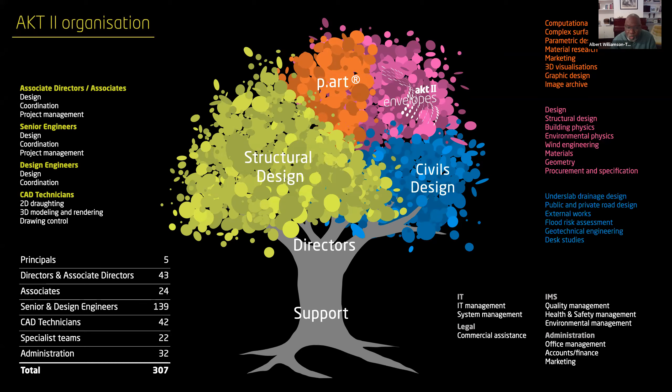London is our doorstep. This gives an idea of some of the areas and some of the projects we've done around the inner London area over the years. Just to highlight some well-known projects, we're doing some of the tallest residential at One Nine Elms, over 200 meters tall, two towers.

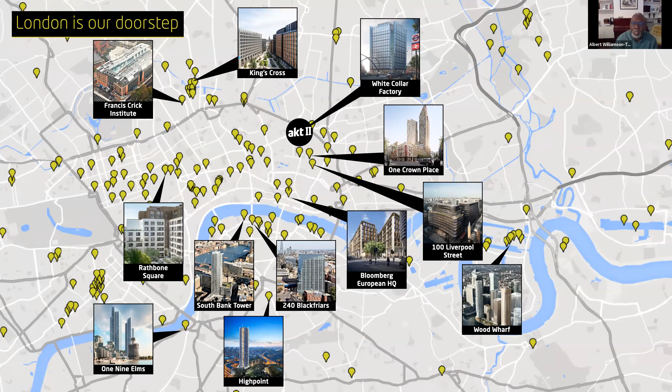But because we're a very design-led organization, academia is very important, so we have academic involvement literally all over the world. We do a lot of workshops and seminars and try, as Dr. Popola was talking about, to learn from other people and exchange ideas.

The way we've set everything up was to basically not try and get ourselves pigeonholed as being called either a transportation engineer or a bridge engineer or offices. We have a situation in the office where we all sit in open plan offices in the white collar factory, which is one of our buildings.

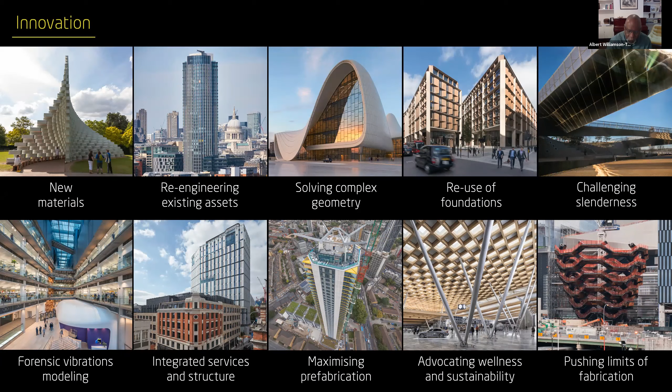And then we're also involved in all the leading organizations, and one of my guys is a professor at UCL. So we make sure we're involved in the right organizations, not just in the UK, but internationally.

Engineering design is not about engineering. The numbers side of what we do is a given. If you're an engineer at the table asked to solve a problem, the numbers and mathematics are a given. The issue is to create a situation where you have empathy with the whole reason the project is being done.

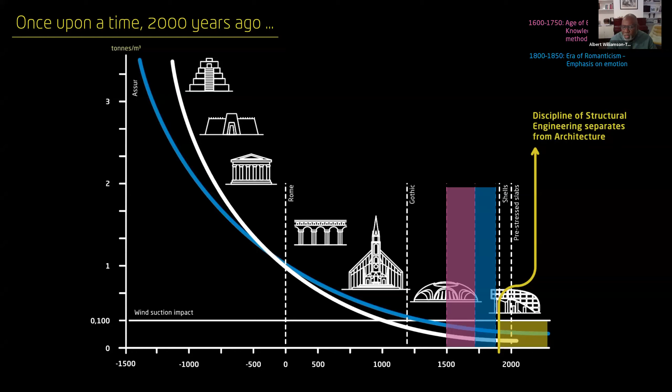What we found at AKT, and for me personally in my career, was to go for the most difficult projects in the office. The more difficult it is, the more challenging, and the more parameters it creates. With those parameters, you can do something different and interesting. So parameters should not be seen as a reason not to do good design—they should be a reason to explore the sides of our industry.

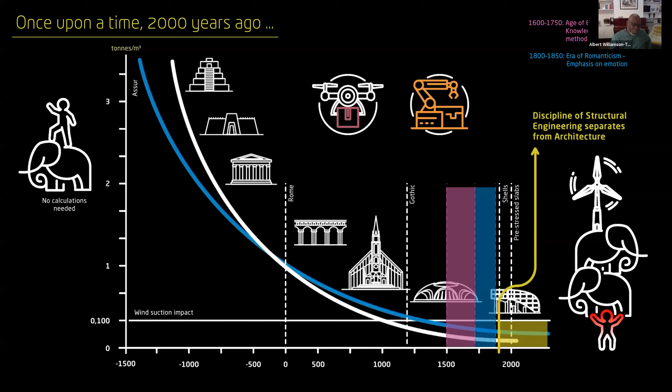It's clear that as time goes on, we don't stand on the shoulders of elephants anymore—we have to carry the elephants, or two of them, in terms of how we make buildings and structures work. We also have to deal with climate change, which has to be embedded in our thought process: low energy, low carbon, and also modern methods of infrastructure, transportation, and fabrication. Those are some of the important impacts.

Innovation is the key to what we do. There was a whole conversation in the late 1990s, 2000s, that innovation is just 'stuff.' I don't believe that. Innovation went through a process where it had to change from the practicality of innovation to the research of innovation, because as soon as the microchip was invented, a whole new raft of engineers came into being, and those engineers had to go through the process of understanding the capacity of what they could do with this new tool.

I remember when I was at university, my undergraduate project was one of the first—only postgraduates were normally allowed to use the computers. I think there were three universities, Imperial, Manchester, and Bradford, because Bradford was an Institute of Technology before it became a university and did nuclear physics, so it had the cyber computers. Myself and two other guys were the first undergraduates allowed to use computers at the time.

The computers we were allowed to use were the old cyber computers, and you could only do two runs a day. That meant you had to get to the computer center before 8 o'clock in the morning, put in your punch cards, go back at lunchtime, look at all the errors, and correct them within an hour. The next batch had to go in by 1 o'clock, and if you were lucky, you'd get results at 6 o'clock. Only postgraduates were allowed to use desktop computers.

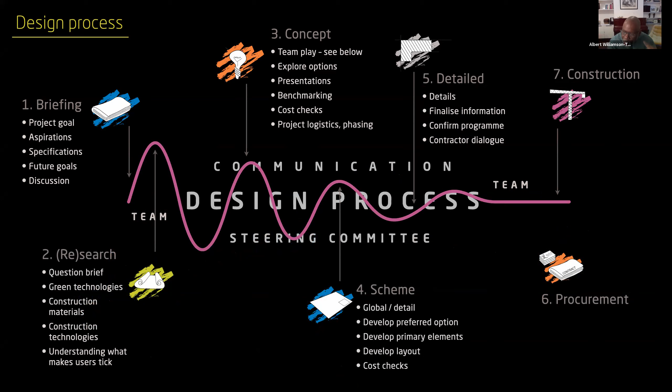So that chaotic nature of design should not be seen as negative. It's a way of our own computer in our own head and the way we process design. In our office - this is the wall at the back of my desk - it's all about sketching ideas. Nothing in the whole process of design is idiotic. None of it is wrong. It's just a different way of thinking.

And by enhancing those ways of thinking, those ideas, you're then able to progress. You may go forward 10 paces and have to go back 8 and start all over again from position 2. That is what design is about, and in my view, something that should be celebrated.

Pushing the boundaries - I'm going to use this area to go through about 10 projects. In my career so far, I think I've done over 130 build projects, more than that, I couldn't say from memory. I'm just going to go through very quickly some of those issues.

My first job was back in 1984, 2nd of January, with Gregory and Associates in Bedford. Then I moved to Price & Myers, and the first project of note was 353 Plaza on Lots Road, King's Road junction. It's one of the first planar glazing glass roofs, a tension roof and a glass wall, done with Pilkingtons back then.

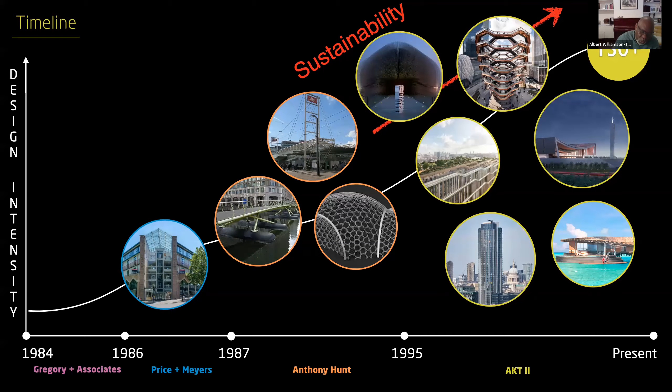So over the years that design intensity has gone on, and as AKT we encourage it to develop with other people. These are some of the early projects - 353 Lots Road, the floating bridge. You can see the small section where it opens, done by a counterweight, so we've only got a tiny little motor which slots into the central spine of the bridge.

The bridge was fabricated by Littlehampton Welding. Bill Totten, who just passed away recently, and we floated it up the Thames from Littlehampton, and then it was literally connected into place.

One of my other early projects, before AKT started, which I was very proud of, was the Sackler Gallery at the Royal Academy of Arts in Piccadilly - one of the first glass installations in a public space. Back then you didn't have laminated glass or toughened glass, it was actually just float glass. But by taking float glass and encapsulating it tight in a stainless steel ring enclosure and going through a testing process, we got it approved - not by any codification process, but by actually a testing process.

So we tested it to destruction, and it stayed in place, and it met all the loads and everything, and it was then built. And the one I'm very proud of, the building, the Royal Academy is a Grade 1 listed building, and we were still able to do some work on it.

And we created these portal frames for the gap on the 3rd floor. By creating the portal frame, the architect, Norman Foster, was very clear. He wanted the glass on the roof to actually run down without any steel members and put a very simple pin. We were able to do that and still provide horizontal restraint to the structure, but doing it in a very different way.

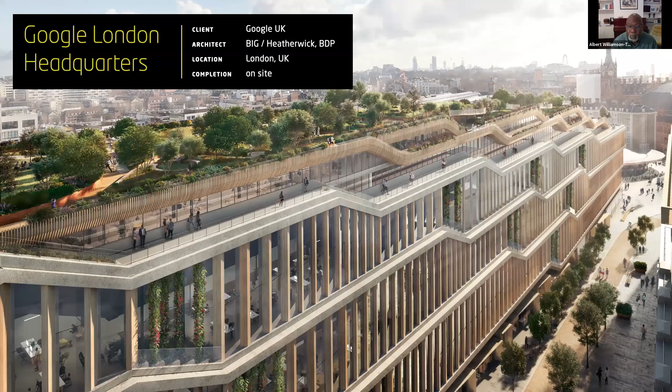Now, I've got roughly about 10 projects which I've put on. I'm going to run through them very quickly and use them as a way of explaining some of the challenges and some of the stuff we've had to deal with. I've got a fantastic team I work with, and design is teamwork. So I may lead the projects, but having young people and people with ideas around you is the way to go, and that's the way we've approached this.

The first one is the Google headquarters in London, which is at King's Cross. The architects are Thomas Heatherwick and Bjarke Ingels, BIG, and with BDP, the executive architects. This building is 300 meters long, so it's actually the same size as the Shard, but horizontally.

Going back, it's roughly at the far end of the building about 66 meters, and it's about 22 meters at the front. It's about 12, 13 stories on one end and down to 8 stories on the other. The concept is that you've got the boulevard next to the building, to open up the boulevard, and this building, the whole ground floor has got no columns at ground level. There's no external columns to this building.

So the way we've done it is we've got a series of frames at roughly 9 meters with these 2 columns. We then run into the cores, and then with trusses that stagger up from the 8th floor to the 12th floor, and they literally hang the external wall and all the floor structure. Every 3rd or 4th floor is a concrete structure, and in between we've got timber floors.

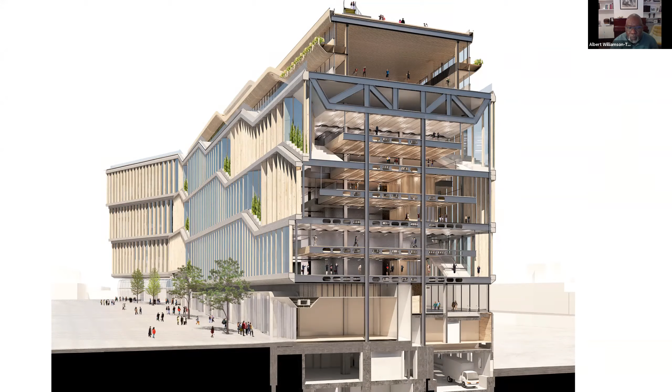So this is an image of the aspiration. You've got these timber floors that are not supported. They're actually hung by the floor above, which is then hung back to the concrete floor, which is then hung by the truss on the roof. So you get these double, triple height spaces on the perimeter of each of the main floors, and then the other floors are staggered in and staggered out.

So these timber mullions are best part of about 12, 14 meters tall. And you've got flats used to hang the building, which are a reflection of King's Cross and its Victorian heritage on steel plate structure. So this gives an idea of the floor plans.

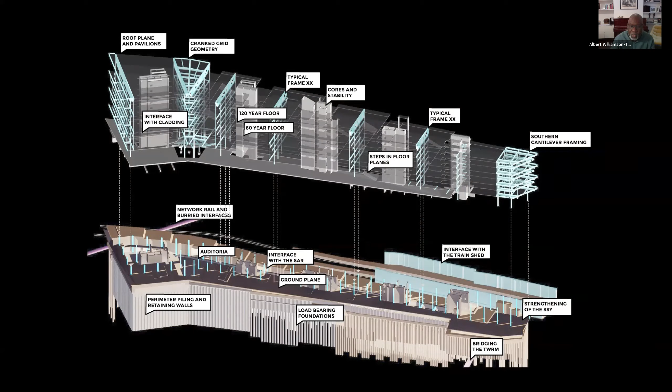These are literally level 3 to level 6, goes right up to level 12. So we've got concrete cores, the best part of 5 concrete cores, and between those cores you've got these trusses with these sections, and then they hang the external wall. So the whole of the ground floor is opened up without any support. This is on site right now, and this gives an idea of the frame.

So we use visualization. All of these images, none of them are the architect's image, they're all ours. We do our own visualization using 3D modeling. We work with Rhino, 3D modeling, any of the modeling packages we will work with. We always tell the architect, just give us your raw model in any format you work with, and we will do the conversion internally.

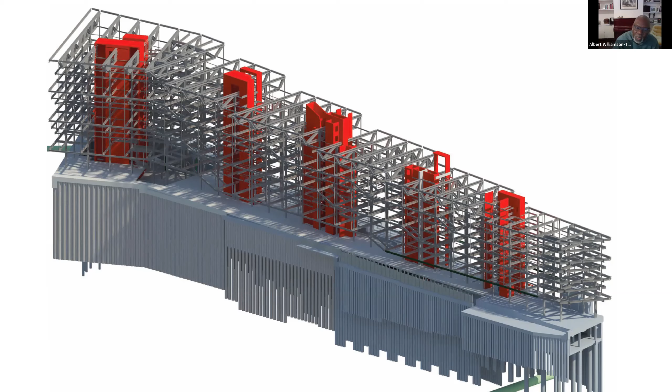And we use them to try and understand some of the overall concept. You've got to work back from a micro to a macro level in terms of how the whole structure is going. So this gives an idea of what we're doing.

The most challenging thing with this project was the fact that we're creating the largest amount of commercial CLT timber floors probably in the UK. And every CLT floor, from a sustainability point of view, they have to add a minimum of 75 of screed or concrete on top of it to deal with the damping.

We are not doing that, so we are going against the norm. We've had to bring Exeter University in. We've done a lot of research in terms of movement to get the response factors, to bring 95% of the floor with response factors below 8, which we've been able to manage. That's done by research and actually doing a lot of testing on site. This was the biggest challenge we had, and we've managed to do it.

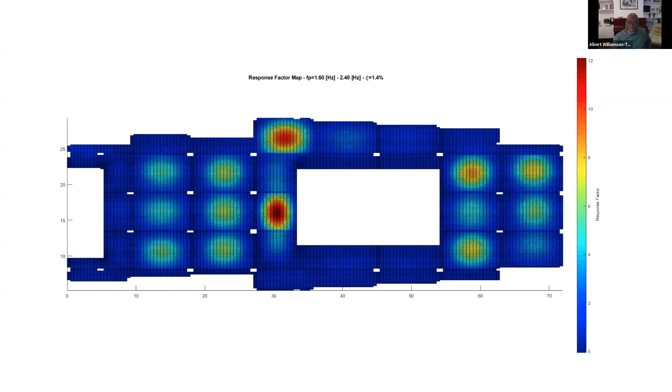The next building I was going to talk about is the Google headquarters in San Francisco, and we were called in. Google had been working with some of our usual competitors for about 7 years, trying to create a series of master plans. This was being headed up directly by Larry Page himself, Mr. Google.

They wanted to create a headquarters in light of what Apple was doing with the ring. So they held an international competition, where they asked a number of architects and designers to come and give them their ideas. Thomas Heatherwick and Bjarke won the project, and we were called in to try and bust some of the myths of engineering.

The client was very much inspired by Buckminster Fuller. The whole idea of the master plan was to create something like 5 to 6 million square foot of spaces. So the first bit was to do a master plan and go into outline planning.

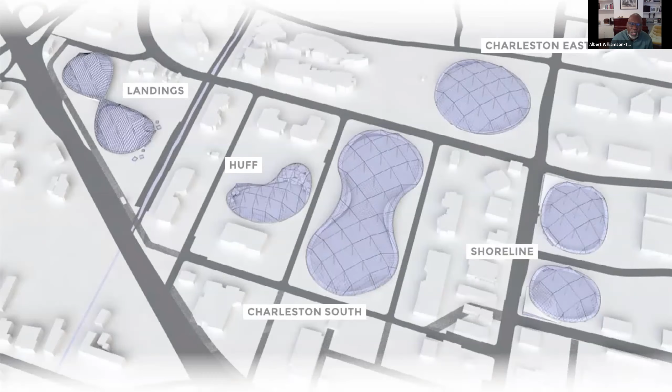He was really inspired by Buckminster Fuller in the 1950s, in terms of how you can create a lightweight dome and beautiful enclosures with walkable spaces internally. His inspiration was that all the offices of Google in San Francisco have got the best part of hospital quality air, which is what he wants his staff to engage with.

So what that meant was he was very keen to create a series of these domes. These are some of the images that went in for planning. We went through that process, which was very complex.

By having the best part of 130-meter domes, the whole principle was to go from creating a dome with a human scale internal, mingling on a park area, like a kit of parts, and then the analysis, the digital and analog approach to make that happen.

Then we come to the materiality and the fabrication. By actually creating this canopy, you're then building inside the canopy. The way Google works is that if they've got a team, they can change it very quickly from about 10 or 20 people to 50 over a weekend when a new idea comes through.

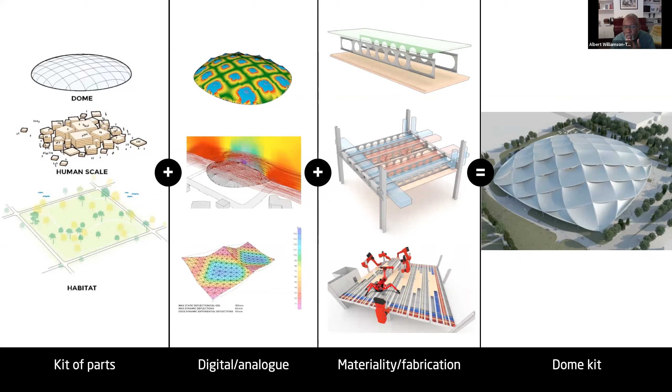They wanted to develop an idea or shrink them, changing the layouts of the floors either over a weekend or a week. So we talked about robotics, using spider cranes, and creating the dome kit. These are some of the processes, and I hope you can see some of the animation.

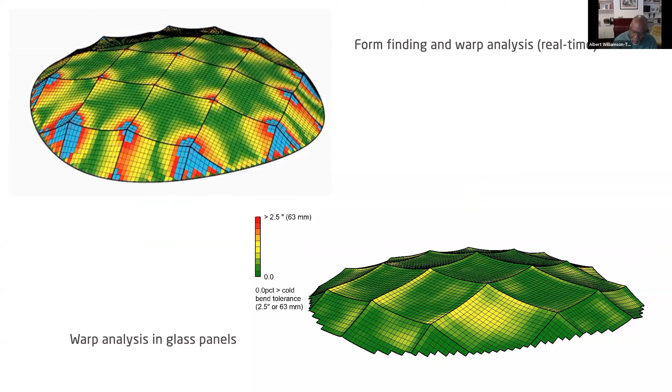These are some of the processes we had to go through: form finding, warp analysis in terms of creating — we started with a cable system using a glass enclosure for the enclosures. Then we developed that further with wind analysis. Remember, we're in San Francisco, one of the highest seismic areas as well.

Some of the analysis we had to simulate was also to make sure there's no ponding. By creating this visual approach, it allows the client to understand some of the thought process of the design team, and gives an idea of the views or vision they had for some of those internal spaces.

These are some of the issues we developed — if we can end up with robotic cranes that clamp onto the columns, that allows you to then remove panels, move things, and use spider cranes to lift and deal with some of the robotics that can be done internally.

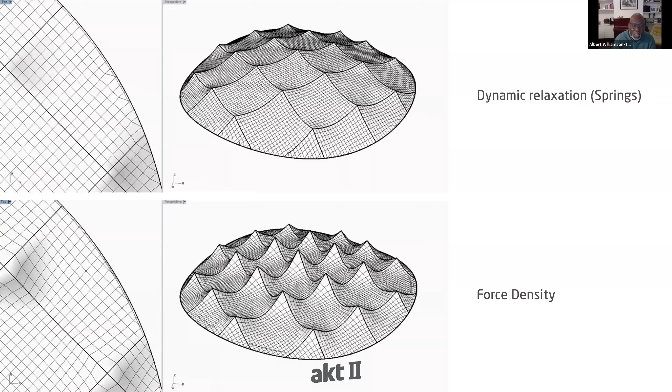Then we had to use dynamic relaxation and force density to look at how this works in real time — the bottom one is a bit slower — to see how we can create this dome by forcing a cable net into place, or allowing it to relax and deal with the deformation. The option we first started with was a cable net option, which you can see here, with a huge ring on the perimeter.

And what that did was force a huge amount of vertical and horizontal forces at the foundation level, which was impossible to deal with in an area that has got one of the worst ground conditions. And in terms of seismic, you end up with a huge amount of liquefaction, and that was very impossible to do. So we had to rethink.

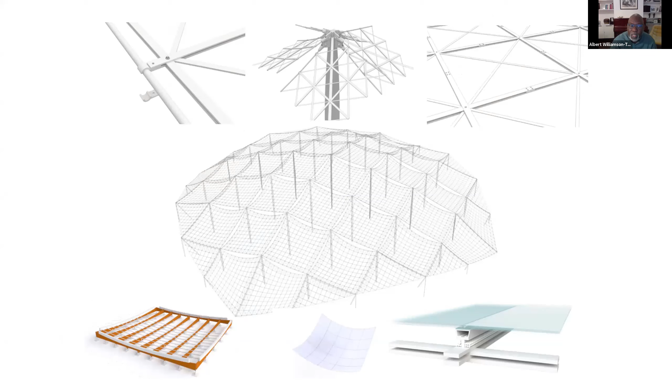So even after we'd done all this, we had to go back again and rethink the whole concept. And what we then came up with, we'll call a grid net, but rather than using cable, using a series of flats, two flats, and you literally cross each other to create this grillage structure, because the flats create their own inherent stiffness, and that stiffness reduces the forces around the perimeter, which in turn reduces the forces that go into the foundation system.

And we then created this dynamic visualization for the client to make him understand what we're talking about. When you're talking about glass panels, on one hand it's a grid net situation, and the other is a cable net.

And the deformation due to seismic effect meant that using glass became a real problem. Every time you have a tremor, you end up with a huge amount of damage to your cladding system. So by doing an exaggerated analysis, using the seismic graphs and coding those and putting them into a real-time matrix, we were able to see the effects and implications of the seismic requirements for California.

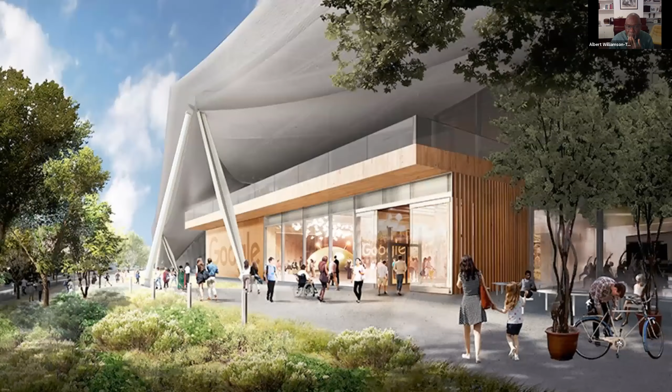So in conclusion, we went through all of this over a period of time. We looked at different options, and we ended up with this solution. And this is it being built. I hope you can see this short video that actually shows it in construction.

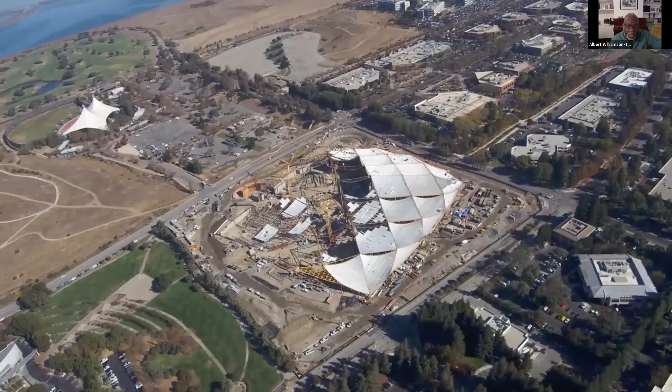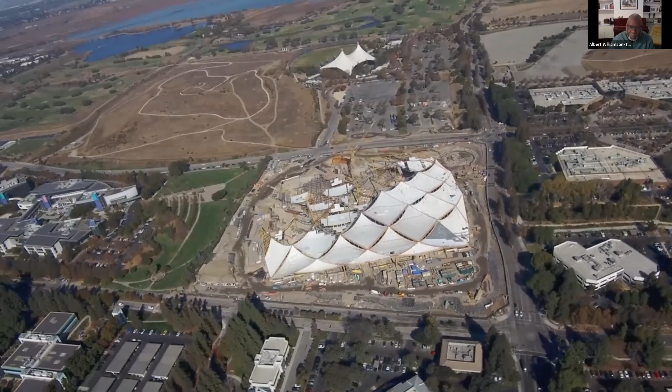Arup are the delivery engineers on this. We did the front end, and they're doing the second part of it. The site, to the south, or to the left coming up, is the main Google campus, one of many, but the main Google campus in Mountain View. So you can see this site, and it's virtually almost completed now.

And then the next project I'm going to talk about is the Heydar Aliyev Center, which we did with Zaha Hadid herself when she was alive, and with Patrik Schumacher. This is in Baku, Azerbaijan. At the time, nobody wanted to go to Azerbaijan, it was a no-go area. And this is the scheme, which is a conference center, a museum.

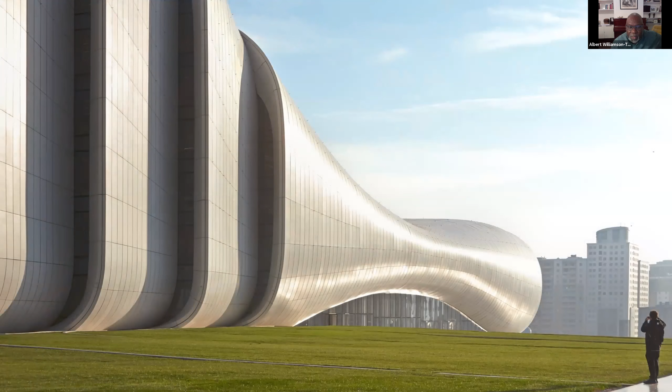The whole idea here was that the ground plane was going to be white concrete that then literally goes into these curvatures. So we were called in and we did a competition with the architect and said, of course we can do it. And this is the real building. How are we going to make this thing work? How are we going to create this?

So you had a theater, you had a museum, you had a conference center, a multi-purpose location for the locals. These are images of the finished product. It's the center.

So our work, the first thing we tried to explain, and also Baku, Azerbaijan is a seismic region. So the first thing we had to do was create a very short report with images, visuals, to explain to the client all the forces that this building is going to be subjected to: wind drag, temperature effect, lateral wind forces, seismic forces, vertical, large movements.

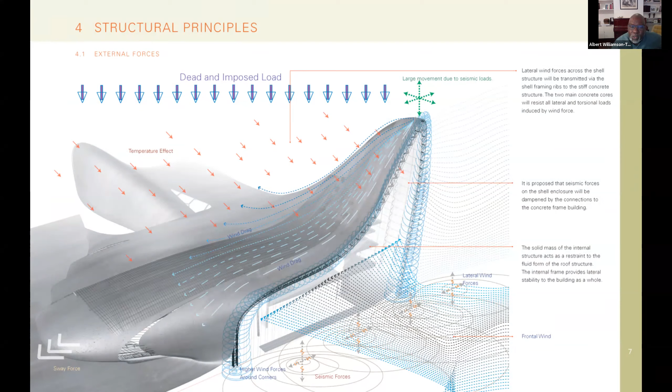We created that, and then we also created a lot of visuals to say, from a conceptual point of view, this is the approach we're going to take, to put a bit of rationality to the form. In doing so, we split it into basically three elements: the vertical core elements, the lift shafts, the main structure; the horizontal element that form the plates, the floors, the levels; and then this shroud, grillage system, this space frame steel structure that encloses the whole lot.

Each one of these is going to be moving in a slightly different way due to seismic effects. So I hope you can see this short movie on the side, which is working in real time from our analysis package.

Our p.art team were able to write from the analysis to the Rhino model. So there's a conversion, and in terms of the movement, we just put a factor in to show movement. This was done in 2009, 2010, to show how the whole structure is going to move, and then in terms of the key areas.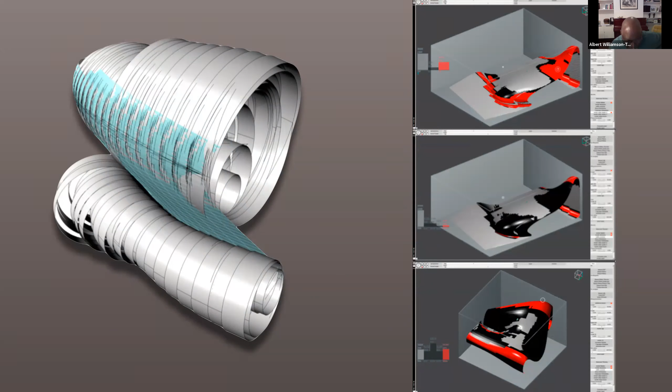The key for us, the most exciting part, was dealing with the cladding system. Our part guys actually wrote this software in-house, and this software was used to pattern the whole of the facade. You can see this short movie, which we did in-house.

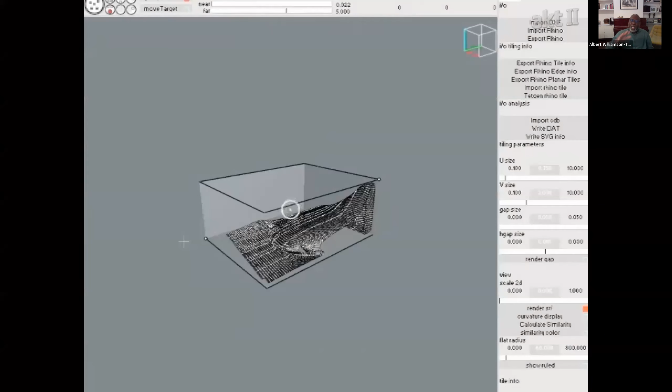We gave this package, the whole thing, to the architect, and allowed him to go through a process of actually determining the size of each panel of the cladding system he wanted. By adjusting the size of the panel and the gaps in between, it then tiled the whole building and color coded it in terms of the ones using flat elements, the ones with specials, which are red, and the ones which are slightly out of tolerance.

So what he ended up doing is giving it to the architect and the whole design team. He then nested the whole lot and drew everything, and we were able to give the data directly to the manufacturer to cut each of the elements. So this was all done in-house.

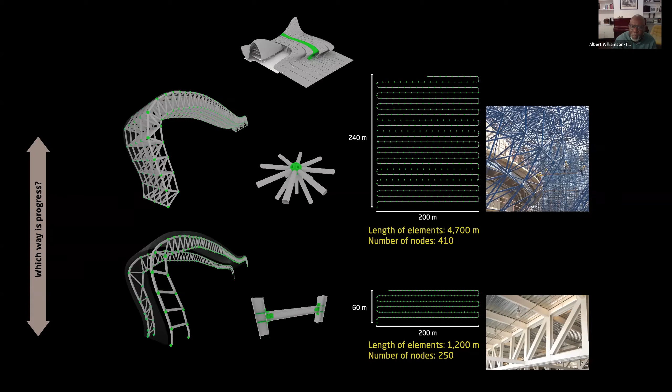But they were the only contractor worldwide who were prepared to go and create the building, so we had to step back again and work with the mirror system to make it happen. This is the building going up, this is the internal - all the curvature had to be determined, and the geometry had to be agreed.

And this is the finished internal layout. This is the concert hall, and this is a performance. And this is the building at night.

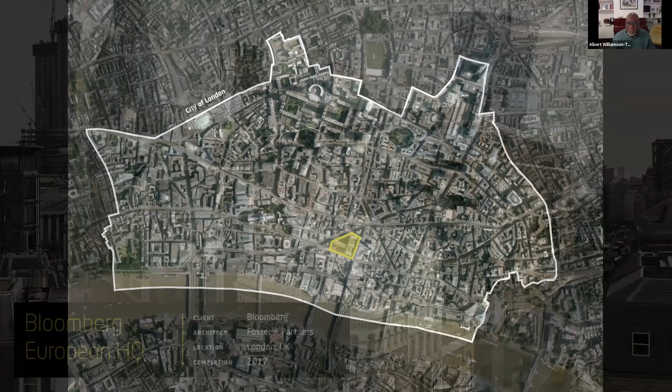I'm going to run through this one very briefly. This is a very important building, a 1 million square foot development done in central London, within the confines of the city of London. This site was one of the last sites which hadn't been developed for a long time in the city of London, and the site was acquired by Bloomberg.

Michael Bloomberg was the mayor of New York at the time, and he said, I've made a lot of my money in the city of London, and I'd like to give something back. Giving something back for him was to try and create the European headquarters for Bloomberg in London. But the challenge was it had to be London-centric, and acceptable to the city of London. It was a very well-established historical site, and there was a whole idea of Bloomberg wanting it to have a fair amount of innovation.

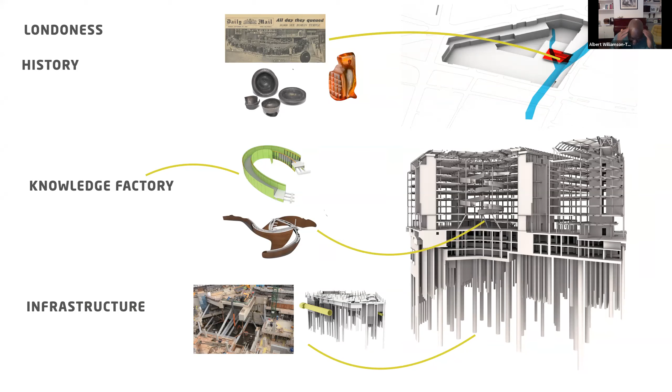Underneath the building, along the side, runs the tube line. And after the King's Cross fire, he said he would actually create a second station as part of our work, so part of our work was also to deal with infrastructure. So let's get a very quick section of the building.

And the grid is trapezoidal, about 13 meters, and we use the thinnest steel structure to make it happen. So people come straight into the center of the building. They use lifts to go to the top, and you also have this ramp stair from the second floor to access all the building.

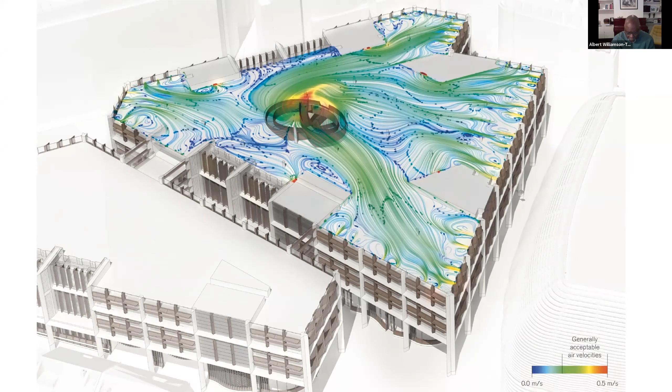So this is the building, 1 million square foot. The challenge was that we wanted it, even as an office building, to be openable windows, and it is one of the largest office buildings in London that hits BREEAM outstanding, the highest level of BREEAM for an office building.

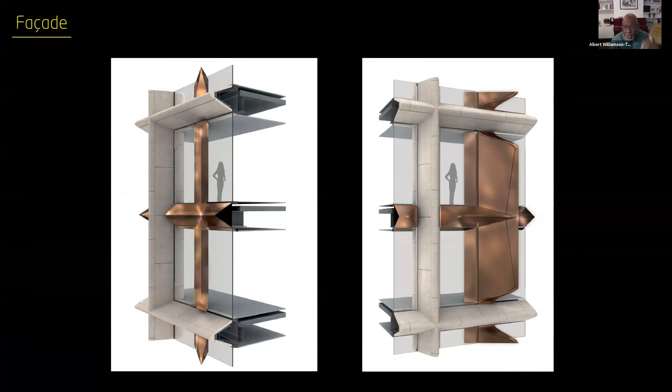And a lot of the work was to make sure it was open and filtered through vents, and keeping the noise away from the building. The facade is bronze, and they had to open an old quarry in Yorkshire just to deal with the amount of stone used to clad the building.

But more interesting was that English Heritage were there. We took out 3,500 tons of soil by hand, and had found the largest artifacts of archaeology on the site, so much so that they actually created a small part of a display unit within the building.

Now, this was a big challenge for us. The site had 3,000 piles on the site, existing piles on the site. And in London, you cannot build a new building onto old foundations because it will not be insured. It will not be warranted.

The CIRIA guide, in terms of how you put a new building on an existing foundation, requires you to actually test a large percentage of those foundations, or you extract the piles from the ground. So we were given this and we said, no, we can't do that. The cost to the client and the time program were just completely unacceptable. So we were in the office having this conversation, and we just took the CIRIA guide, tore it to pieces and put it in the bin, and said, let's think of a different way of solving this.

What we came up with was to actually change the whole scenario of the question. Are pile foundations part of the structure, or are pile foundations part of the ground? In terms of insurance purposes, a pile foundation is part of the structure. So we said, okay, we're going to dissociate the existing piles as part of the structure.

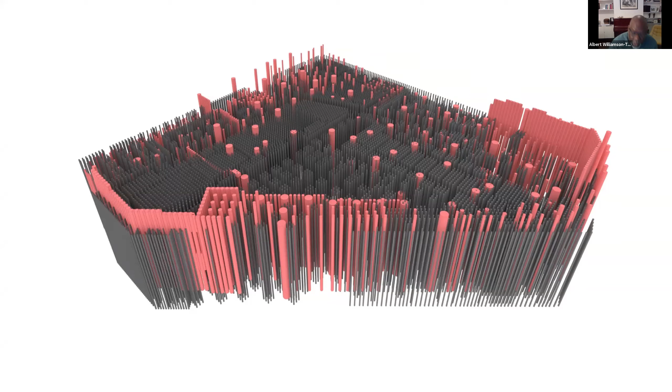So this is the building, and you can literally see some of the tube lines below. So we created a new station. And this is a comparison between the Shard. They're roughly the same area, just about 1 million square foot each, one slightly more than the other. But you can see we're using more steel than they are because of the spans we're doing, and the fact that there's a massive concrete core in the center of the Shard, which we've got less concrete.

The internal ramp, we did this model for the client, and the areas where you see the funny bits, it's only supporting a number of areas, a lot of modeling. These are all our own internal modeling system, and this is it built. And this literally wraps itself, overlapping in a helical version across the whole building, with the views being maintained.

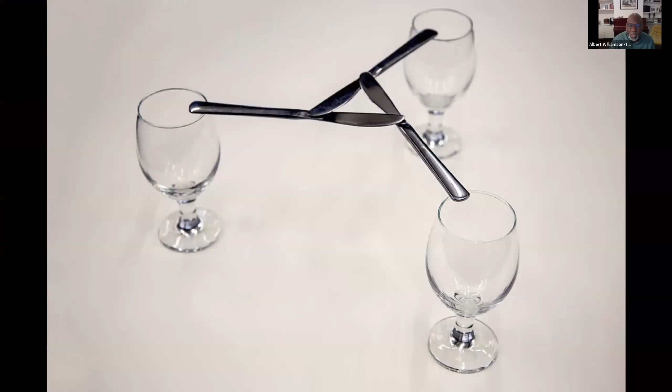And the entrance building was done with a tripartite support system in a 3-dimensional form, which we developed in sustainable timber, for the entrance and the center of the building. So this is a completed building, and the views to St. Paul's, and the height had to be maintained. And the lighting system is using tiny little LEDs, so you don't get a shadow, you get full distribution of light and nothing hanging down. So massive, you know, you can feel the space, even though it's very tight.

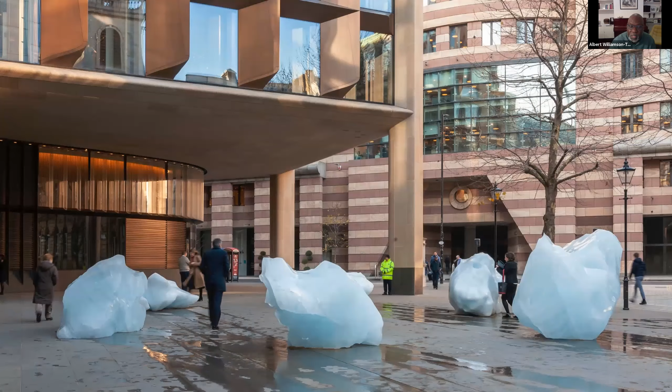Now, these are the fun ones. This is the Shanghai Expo, in 2010, which we entered the competition with Heatherwick's, and we won it. The idea we had was to use 100,000 spikes in a building to create a building.

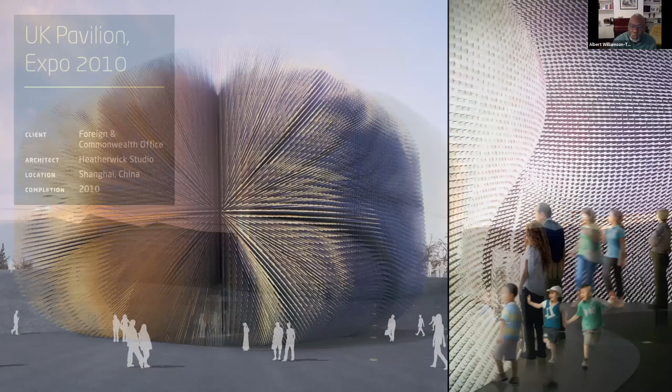These are some of the images we had for the competition, and this was the image we, as the engineers, created. We said we can get 100,000 spikes through the structure. They said, well, there won't be any structure left. We said, well, that's our problem, leave that with us. 100,000 spikes using acrylic as a structural material with aluminum to create this building. And it became a diplomatic issue.

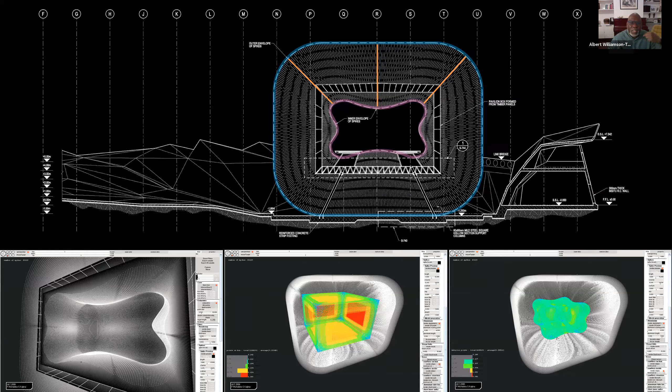So, as usual, we went through a visual process by using technology and processing power to create scripts which we used to explain the design. The whole building used 7.5 meter long acrylic spikes with aluminum, and the form on the outside is reflected in the negative form on the inside, with the angles matching.

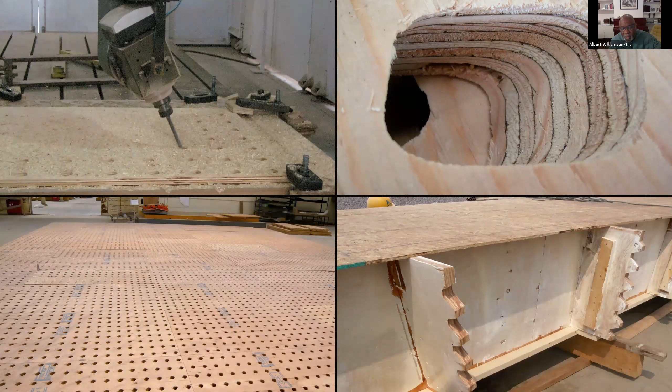It's literally 20 by 20 acrylic spikes, 7 meters long, in a 30 by 30 aluminum casing for part of it. The World Seed Bank donated seeds, which were fused into the acrylic for the internal spikes. A lot of testing was done in London and Germany on the spikes. We used CNC cutting to drill the holes at close centers through the whole structure. We did not manage 100,000 spikes - we ended up with just over 60,000.

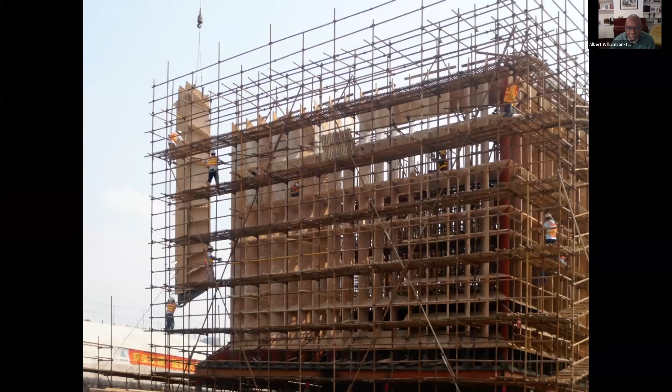The brief from the client after we won the competition was simple. With the expos, they always judge each pavilion to see who's the overall winner. The Minister of Foreign Affairs at the time, we had a meeting with them at Westminster, and he said, look, you only have one brief from me, and the brief is your pavilion has to be in the top 5 of the winning pavilions. So this is the final result.

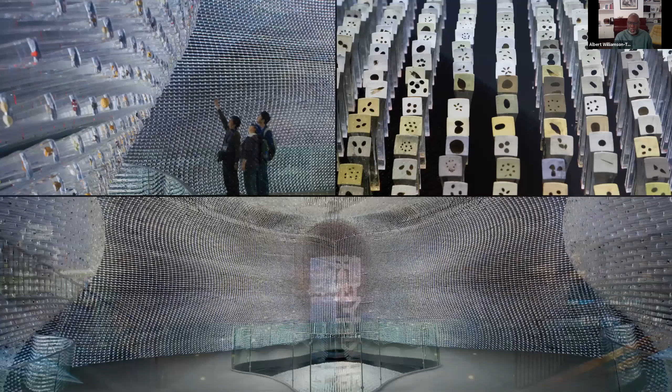During the day, light goes through the acrylic into this space, and at night, when it's lit internally, it actually reflects itself externally. This is the internal view, the real thing, what it looks like internally, with each seed from the seed bank - 60,000 seeds from the seed bank fused into the acrylic.

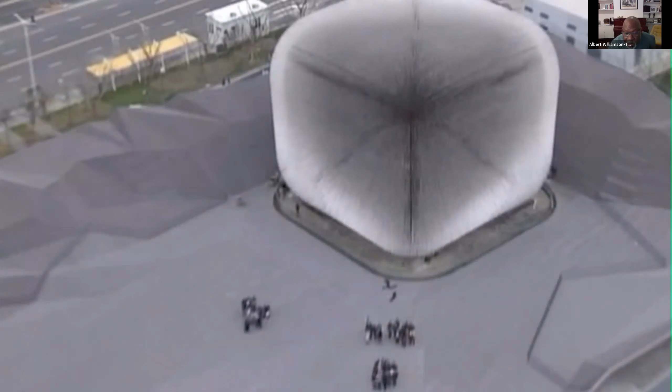This is a video of the finished product - not a render, this is the finished building. It actually won the best building in the Expo, and won the Lubetkin Prize, the RIBA Lubetkin Prize, for the best design worldwide.

As engineers, as raw engineers, this is one of our favorites, and I'll run through this quickly because we're running out of time. This tower on the left is an existing brutalist tower built in 1974. Internally it's a waffle slab, and the external columns are precast concrete. It became dated and was empty for a while, and was then put up for sale.

All the other clients wanted to demolish it and build new buildings. Our client called us and said, guys, what do you think - can we put the original engineers, who are still around, to say you can put 4 stories on it? Can we put more? I said, I'm sure we can put 8 stories or more on it. He said, sure? I said yeah, there's a lot of strength - I said no problem. So we designed it for 8. He bought the building because it didn't need to be demolished.

From a sustainability point of view, it's probably one of our best buildings. After we argued we could do 8, he said it didn't work for him - he needed more. So we said, let's do some more detailed analysis, give us 3 weeks, which we did. We said we can actually add 11 stories to a 30-story tower, and everybody thought we were taking the piss.

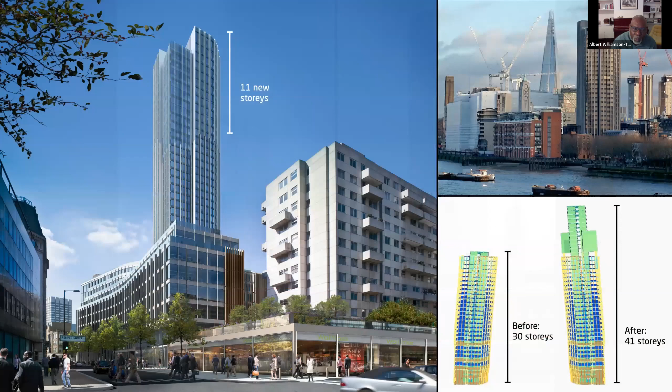This is it. So we put 11 stories on the planned floor, and the podium building, which was 6 stories, we added 3 more floors. So that's 50% on the podium building and 30% on the existing tower.

And we did not strengthen any of the columns or any of the foundations — we didn't even touch the foundations. And this is what we did. There's also a tube line running literally right underneath it as well.

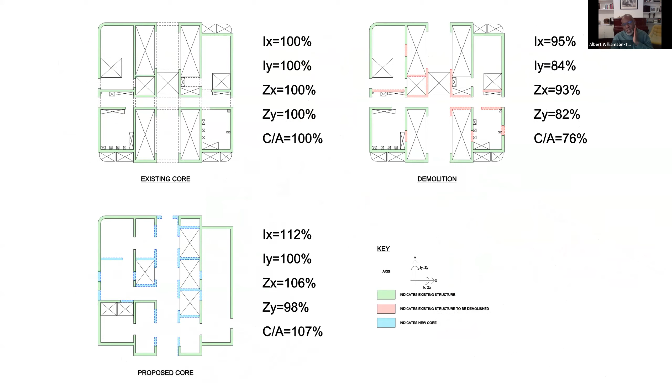So movement was important, and we had access to all the existing drawings. One of the key issues was to take the core, which was a commercial core, and reconfigure it into a residential core. In doing so, we were able to improve the stiffness by about 7%, and reconfiguring it allowed us to do some of what we needed to do.

What we've done is actually pre-stress the core by adding more load to it. That way it never goes into tension any longer, and it uses each floor again as an outrigger — we're able to get it to work.

We've got our own CFD analysis in-house, which we wrote and developed to deal with actual wind loading, and it's certified. We were able to understand exactly how the wind forces act on the building, and then we were able to increase the core. This is going up, and this is the top, the flat tile.

So the client was very pleased — financially it was a big win for him. And this is the finished building.

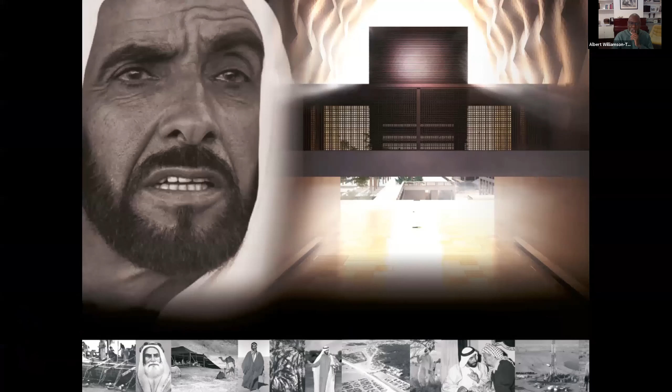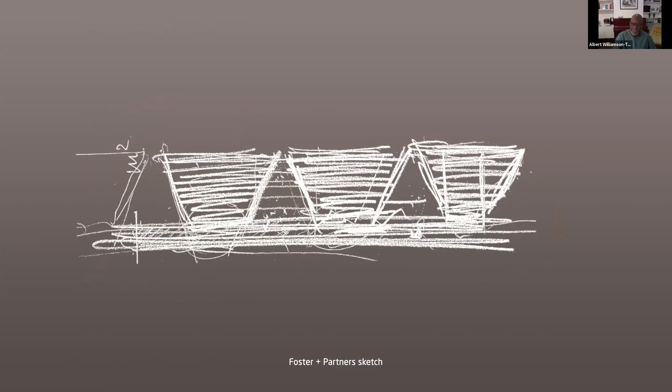We entered the competition with Foster & Partners, and the design we did was very low-key, very sustainable, because we did Masdar — so we knew how to work in the region. And we won the competition. They said they hated the design but loved the approach we took in terms of our thinking. So Foster's and ourselves won the competition.

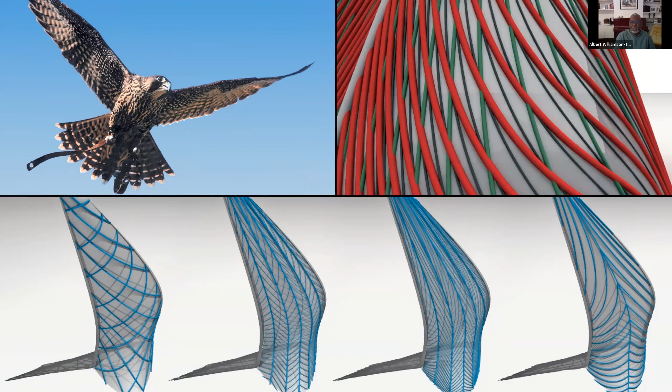So, having won the competition, the client's idea was that the falcon is something they love, and they wanted something to reflect that. So the whole idea was to have 5 wings going up — the tallest wing is about 115, 120 meters tall — and inside each one of these is a gallery, creating a mound.

The first thing we did — we thought this is going to be a nightmare as you change things — so we asked the architects what they were going to use to do this. They said they were going to use 3D Microstation. We said fine, so they created the original form in 3D Microstation, which was fine.

We then took it and created some parameters by using tiny little stainless steel tubes for curvatures and box sections for verticals, creating these nested elements. We then wrote parameters into the software and gave it back to them, saying they could now play with it and create whatever shape within these parameters for the wings as they wanted.

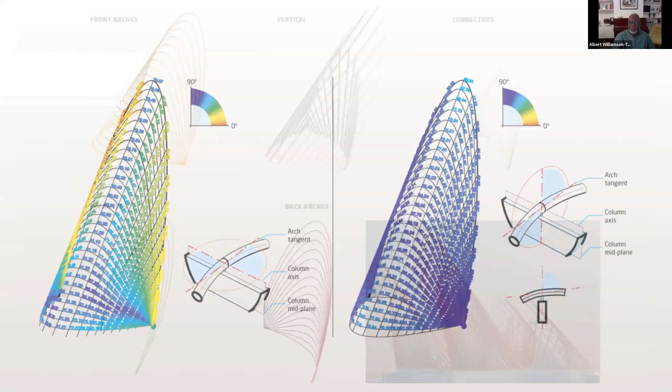So by the time they gave us back the forms and the shape, we knew it would work — we didn't have to worry about it. The way we split it up: the curved elements were tubes, the vertical elements were box sections, the connection nodes were a series of the same typology, and that created the form. So this gives them very simple elements to allow them to do what they needed to do.

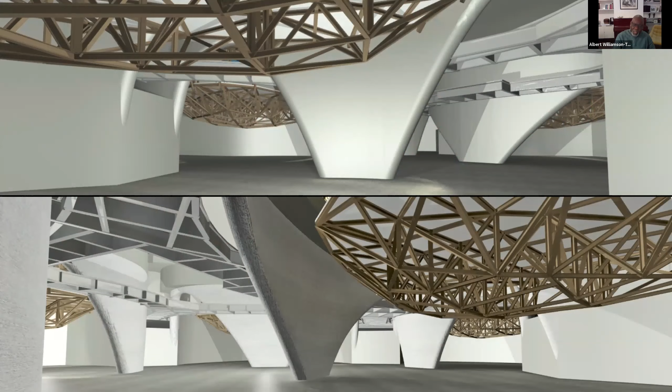And this is what was done. The project stopped for about 7 years - they had actually dug, and then the recession hit. Then it started again. The delivery engineers at WSP are doing a great job on our behalf, though it's changed slightly since then.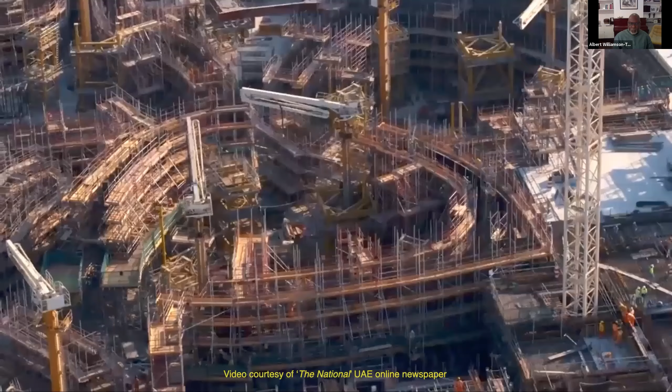Here's a short video - it's now back on site, from a few months ago. It's being built, and it's the second one after the Louvre in Abu Dhabi to be completed. It was designed quite a while ago, so now it's on site.

I'm quite pleased and proud of this. This is how it's going to look - they've kept the whole concept of keeping the underside free with the galleries basically hung. We developed the concept and took it to detailed design, and though times have changed, the core concept and ideas have been maintained. Hats off to WSP, they've done a great job.

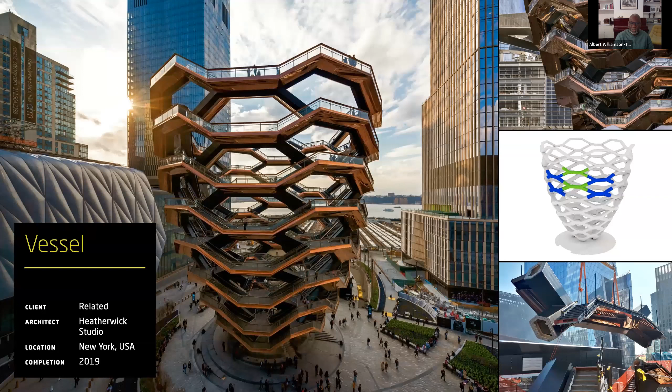This is one we're very proud of - the Vessel on the West Side of New York. We're developing the whole area on a podium, with rail tracks and bus tracks underneath this building, so all of this sits on a podium.

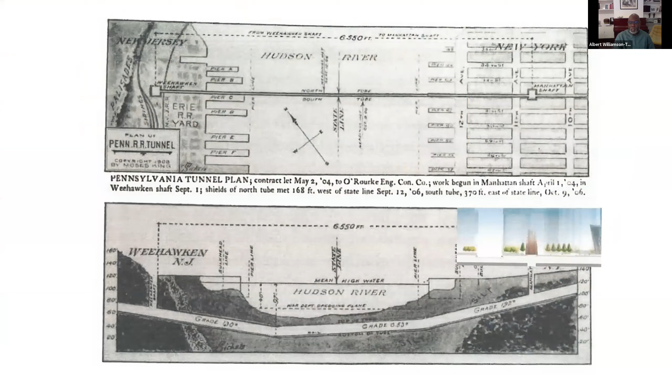They wanted a sculpture internally, and Thomas was asked to do it. He called us in and said, let's try to do something interesting, something useful, not just a sculpture for people to sit and take photographs. This is the Hudson River, and next to it is Hudson Yards.

This was his idea: take people from the ground plane looking at all these tall buildings and give them some elevation so they can see the beautiful views, enjoy the public space, and enjoy the sculpture at the center of the whole development.

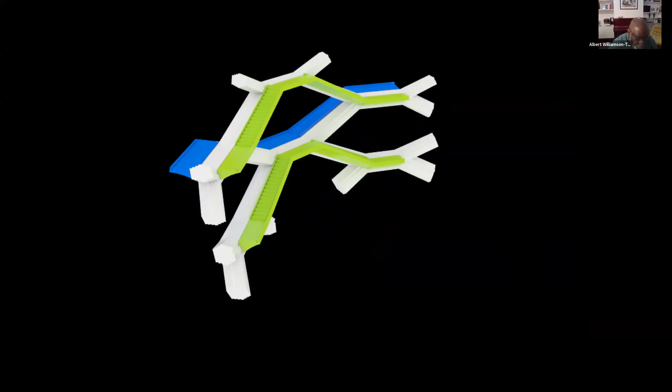This was a real challenge for us because of the shape of the staircase - we came up with a wishbone form where you had staircases to access each level. At each platform level you can sit, have your lunch, put a table there, and even use it for concerts.

We then had to rationalize it in a way that allows it to be built. The beauty of this structure is there's no difference between the architecture and the design and the structural element - they are one. That means the best designs are where the architecture, the design, and the engineering work hand in hand.

The issues we had to deal with were the dynamics of people walking, running up and down staircases, and if there's a concert, everybody dancing - so the dynamics of each scenario had to be considered. So we put some dampers in it.

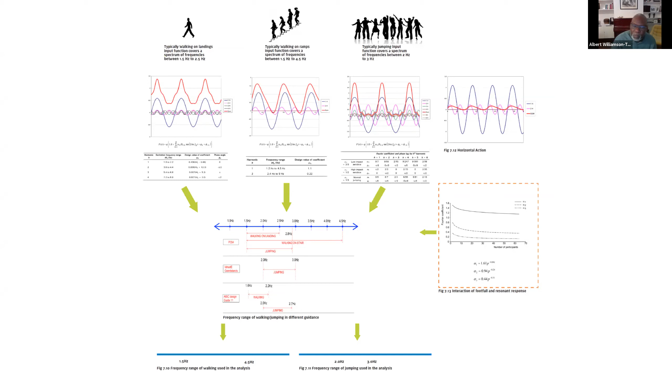As I said, the form of the whole structure is also the architecture and the structure. So the geometry was very important - we established the geometry entirely in 3 dimensions. This gives an idea of the maximum amount of people you can have, which is 1,800.

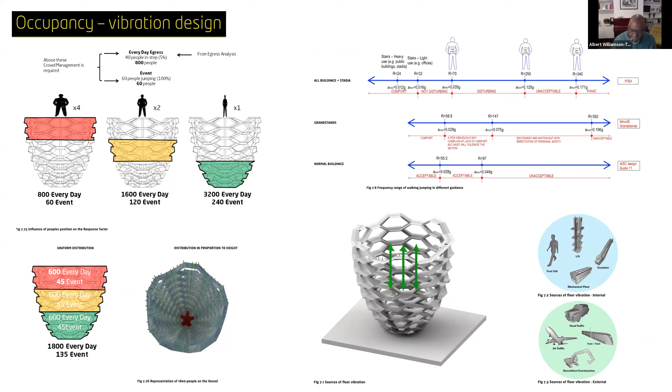We used these images to explain to the client what we were dealing with, looking at stadia and the R value of stadiums and grandstands for normal buildings, and all the sources of floor vibration that can happen from people, trains, escalators, and external vibration, and what that means for this structure. We went through all this and created dynamic models.

These are the first 3 modes of movement. The first one is vertical, and the others are swinging motions, which we accelerated in simulation so we could explain and show them to the client.

This is a very short video showing the opening of the structure, and you can see the views from the top of it. Now it's being used by people doing exercise during lockdown - they're all running up and down the stairs, doing their steps. We're quite proud of it.

And this is the finished product - that's polished copper.

I can remember one interesting conversation we had was to say it had to be done with local materials as much as possible. The biggest conversation we had was the foundation. If you're going to do a 25-story tower, we need piling. And the rigs that were available at the time would not go very deep and were not big enough, and the cost was too strong.

I said, okay, if we need bigger piles, if you're going to go taller, you need bigger piling rigs, and Accra is very low rise anyway. As soon as you start getting to super tall buildings, you need big piling machines. We're not going to buy one. We're not going to do it for a building. So we're not going to pile it.

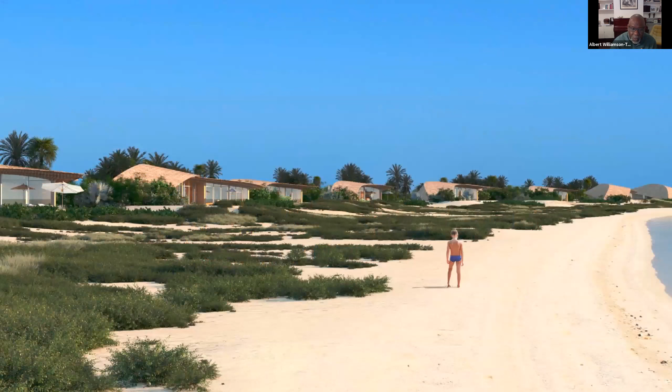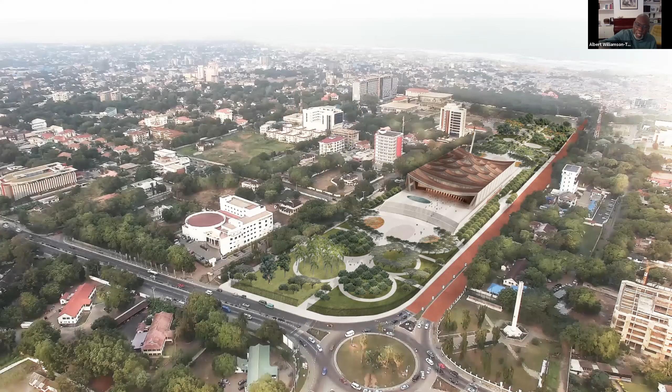This is the site, and those of you who know Accra, next to Parliament, State House and the International Conference Center, Osu Cemetery, is the whole of the red bit, where we are, next to Castle Road, very close to the stadium and Independence Square. So this is it in context along Capitol Way, and the whole cathedral sits in there, with parks on either side and a podium building.

This building, and this is fascinating, I'm very proud of this building and this design, but we've had to go through a huge amount of battle with some of the client bodies to get it understood. I really take my hat off for the work that David Adjaye is doing, and their office in Accra is the one doing it. Because I don't believe as engineers and designers from Africa, we need to be apologetic about what we do. We do some amazing and good design ourselves.

Some of the convincing we've had to do was to convince people that the whole idea why David won this competition was to actually use references from historical Ghana, in terms of how the elders and rulers used certain forms, to create a form which is cathedral in its shape, and of a scale to match any cathedral worldwide.

This project was presented at the World Architectural Festival, where everybody was going, wow. For me, this is one of the projects where Africa is coming out. Personally, and I hope I don't upset anyone, I am tired of things being built in Africa that are a reference taken from something done in Europe, Germany, or China. No, we have some very powerful sculptors, artists, intellectuals and people in Africa.

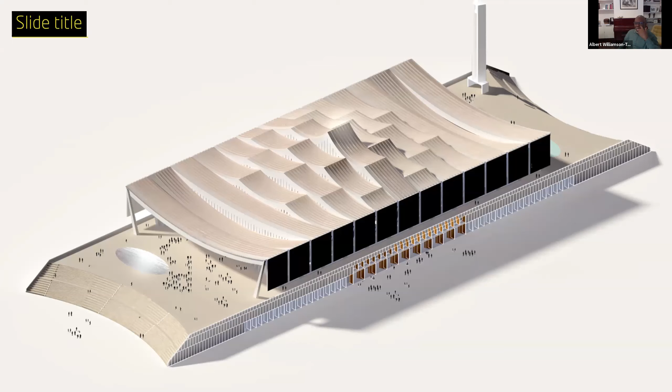We do not need any more references from overseas. When this was presented, there was a whole conversation saying, oh why don't you make it a cable stay roof? No. For me, this is an approach that actually says this is Africa. There's no colonial reference to it. And to me, that's the direction we should be going in terms of our thought process.

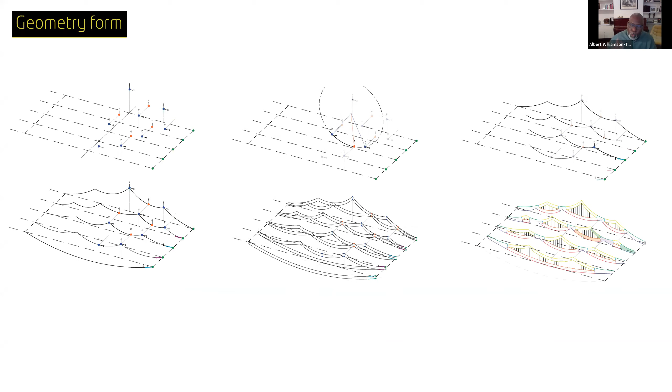So the challenge for us is how do you make something catenary that looks like it's going to fold in support? And I still have people saying to me, how do you make this thing work? Does it really work? Of course it does. The geometrical form was first to take the model and then make it geometrically readable from a manufacturing point of view.

We are going to build this building using local materials right across. So the roof structure was a combination of catenary trusses in a Venn form for the lights to come in, pushing the support inwards, right up to a shallow arch, which is also a Vierendeel arch beam section trying to push the columns out. But actually having the wing walls, which are part of the art, and also the shading.

Some of them lighter as it tries to push out, to reduce the amount of pushing out, and some of them very heavy to counter the pushing. And by shaping the columns, we're able to create a structural system that creates this effect.

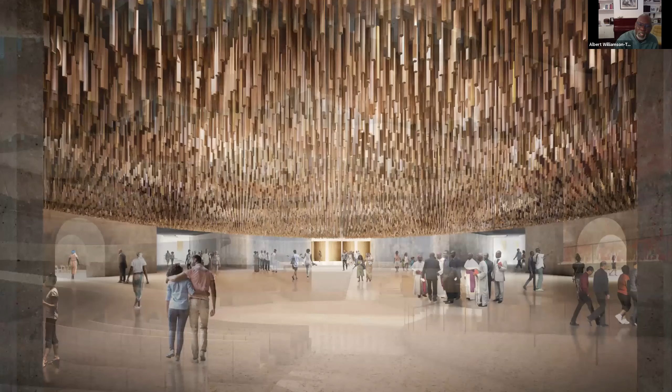Wow, wow, wow. Albert, I didn't want you to stop. Wow, you could go on for the next three hours and you will keep us amused. This is fantastic, this is amazing.

I mean, you're not just going from simple, straightforward structural engineering. You're taking us back to the thinking behind it. Why is the building necessary? And what are the things you need to consider before you then start ordering cement and brick, and even consider your manpower resources? There are about 10 or 15 questions already pouring in as you were talking.